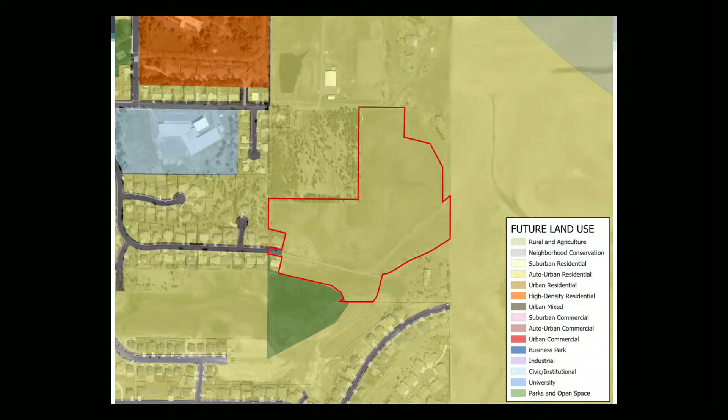So what the comp plan says about auto urban residential: it's intended to contain predominantly single-family detached homes on lots ranging from 7,000 to 11,000 square feet in size, more isolated from surrounding uses, which may require residents to rely more on automobile transportation. It could include areas generally anticipated to be developed for low to moderate density residential uses at densities between 3 to 6 units per acre, which could include a mixture of detached single-family, twin home, and townhouse residential dwellings. It points to the R1, R2, and R3 zoning districts as being the most appropriate for that designation.

That brings us to the current zoning configuration of the area. As I mentioned, it's ag forest, as are the properties to the north and east within the county. Properties to the west and south are R2 designation, which is the proposal before you tonight.

The R2 zone is a moderate density residential zone, appropriately applied where single-family dwellings predominate the area, terrain is not harshly irregular, and smaller lot sizes can be accommodated without extensive earthwork. Utilities and other public facilities are adequate for the densities allowed, and the existing lot development patterns and policies embodied in the comp plan also guide the application of the zoning district.

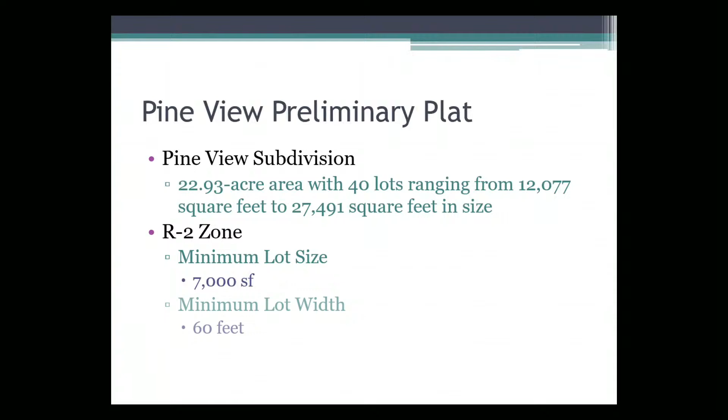So that brings us to the proposed subdivision before you tonight, Pine View. 40 lots ranging from a little over 12,000 to 27,491 square feet in size. R2 minimum lot size is 7,000 square feet, so exceeding that by quite a bit. The minimum lot width is 60 feet, which all these proposed lots exceed by quite a bit as well. This is the proposed subdivision plat.

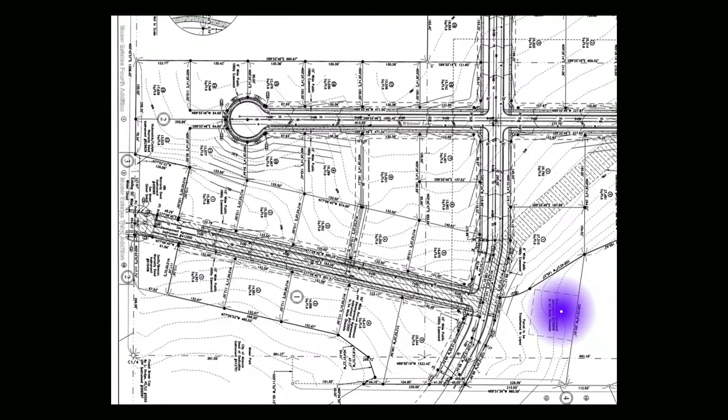So moving further to the east, you can see the subdivision's proposed to be extended and stubbed to the property to the east.

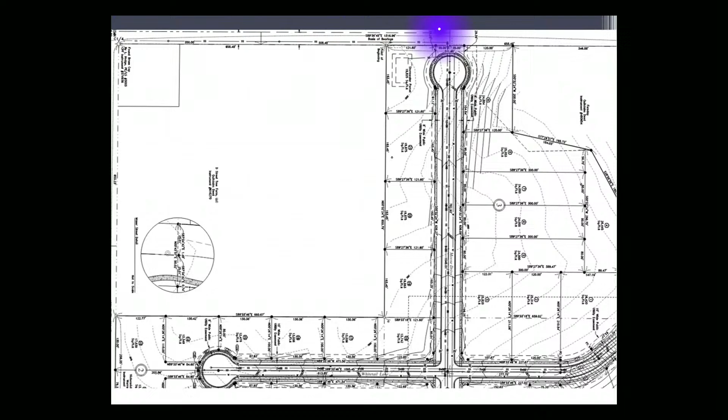And then looking to the north, there's a cul-de-sac proposed. This is required for fire truck turnaround purposes, but the right-of-way actually extends to this northern property line. So if D Street were to be extended in the future, it would tie into that intersection with Moose Drive.

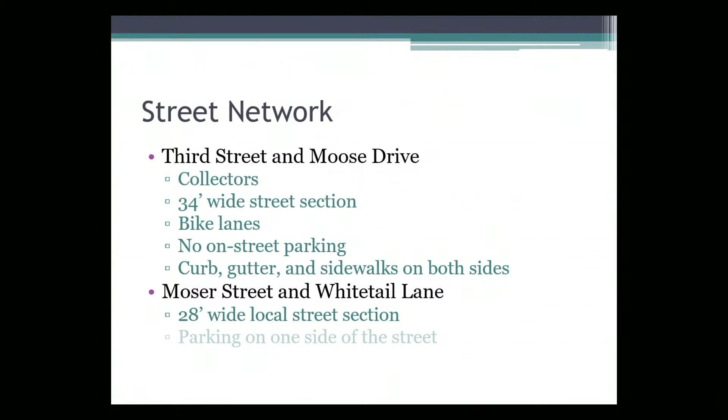So looking at 3rd Street and Moose Drive, they're collector streets, which means they're 34 feet wide with bike lanes, no on-street parking, curb gutter sidewalks on both sides of the street. Moser Street and Whitetail Lane are local neighborhood streets, so they're 28 feet wide, with parking on one side of the street, and of course curb gutter sidewalks on both sides as well.

Water service in the area - there is an existing main on Moser Street and a future main in 3rd Street when Rolling Hills 10th is extended. Sanitary sewer is proposed to be extended through the subdivision and conveyed along existing utility easements along the future alignments of D Street. The subject property is considered developable in the comprehensive sewer system plan.

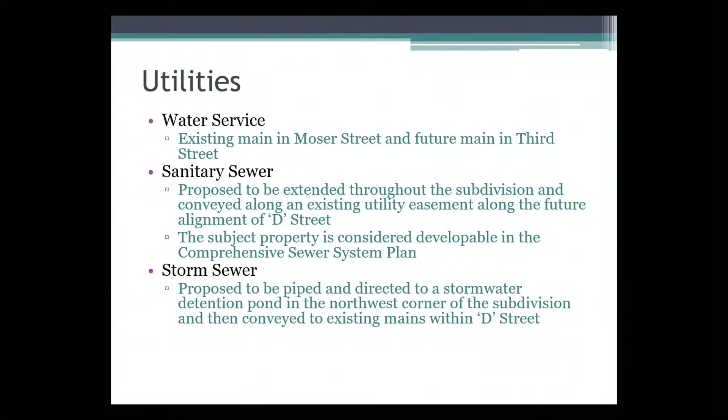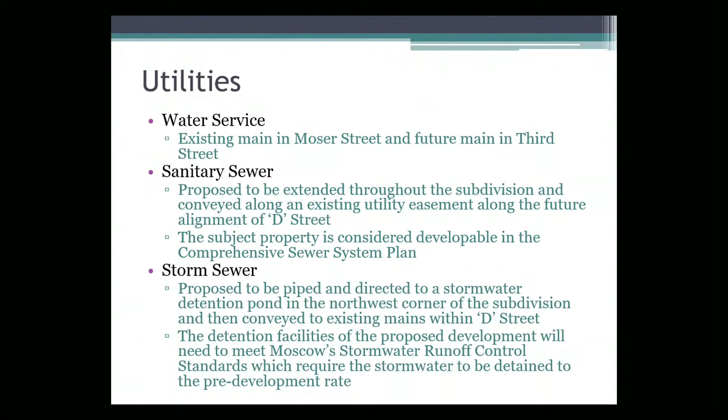Storm sewer is proposed to be piped and directed. There's a stormwater detention pond in the northwest corner of the subdivision next to the cul-de-sac, which will then be conveyed to existing mains within D Street. There is a utility easement that runs along that property that connects to the existing mains in D Street, even though there's not right of way for a street. And of course, the detention facilities of the proposed development will need to meet Moscow's stormwater runoff control standards, which requires the stormwater to be detained to the pre-development rate.

The parkland dedication requirements have previously been satisfied with a parkland dedication of 1.37 acres towards the creation of the city's Moser Park in 1994. So no further parkland dedications required.

Staff recommends the commission conduct the public hearing and, upon consideration of testimony received, recommend approval of retaining the existing comp plan designation, approval of the proposed rezone from ag forest to the R2 zone with no conditions, and approval of the proposed preliminary plat referred to as Pine View subdivision with the following conditions.

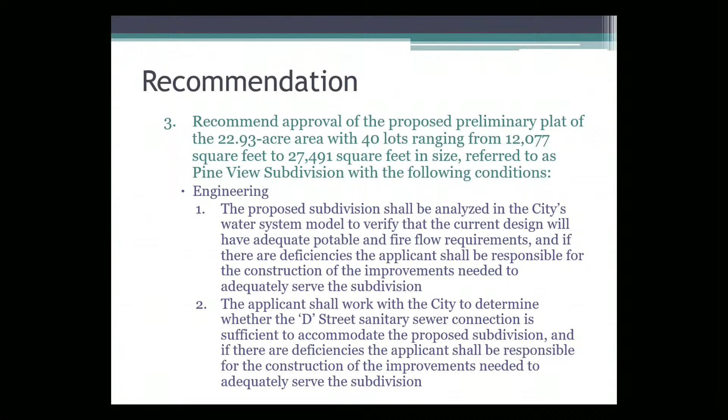If there are deficiencies, the applicant shall be responsible for constructing the improvements needed to adequately serve the subdivision. Third, in accordance with the prior development agreement, the applicant shall be responsible for constructing all public improvements from the current terminus of Moser Street to the subject property. There are a couple of lots there that were allowed to be developed with houses, and those currently don't have street improvements in front of them, so this would be the responsibility of this applicant.

Fourth, the applicant shall be required to conduct a detailed stormwater discharge analysis, including any mitigation actions necessary to ensure the stormwater facility has no downstream adverse impacts, subject to the approval of the city engineer.

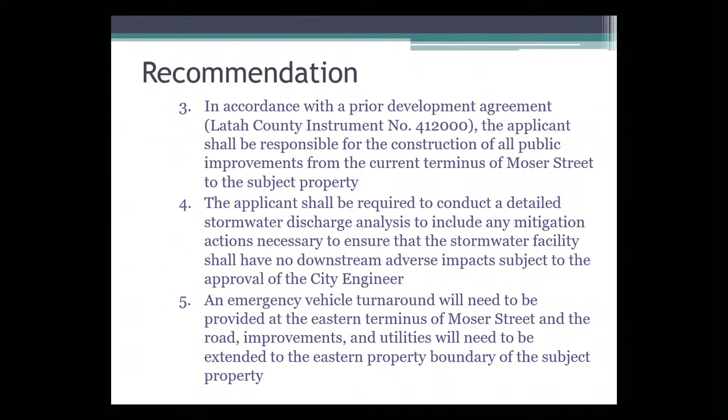Fifth, an emergency vehicle turnaround will need to be provided at the eastern terminus of Moser Street, and the road improvements and utilities will need to be extended to the eastern property boundary of the property.

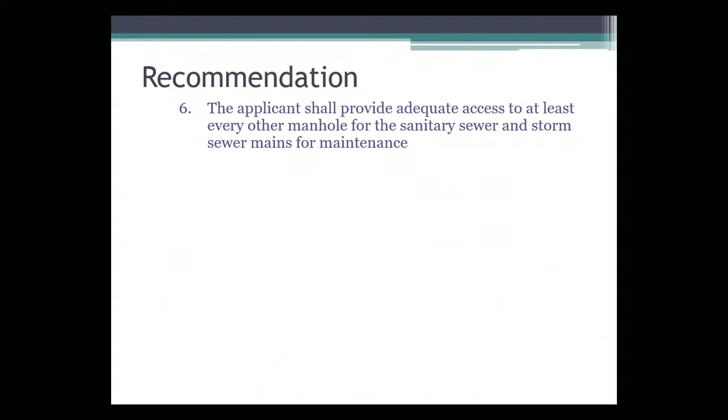Sixth, the applicant shall provide adequate access to at least every other manhole for the sanitary sewer and storm sewer mains for maintenance. The applicant shall also connect the water line in Whitetail Lane cul-de-sac to the water line in Moser Street for water quality and redundancy purposes.

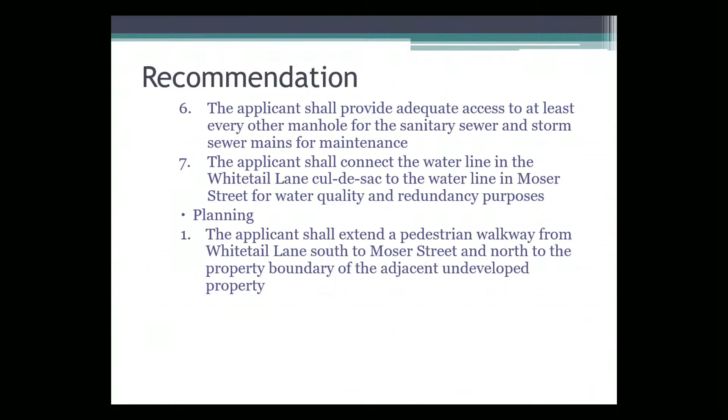Lastly, the condition recommended by planning: the applicant shall extend a pedestrian walkway from Whitetail Lane south to Moser Street and north to the property boundary of the adjacent undeveloped property.

In accordance with the commission's decision on the comp plan, rezone, and preliminary plat, staff will be directed to prepare RCS documents to be reviewed at a future meeting. I'd certainly be able to answer any questions you had.

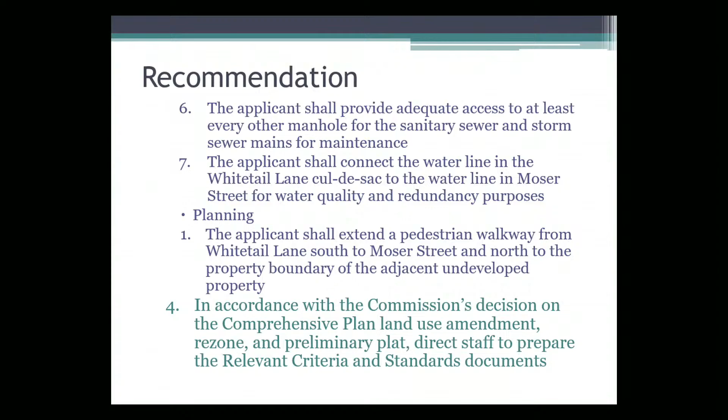Does anybody have any questions, Sue? I have a question. It says R2 Auto Urban Residential calls for lots ranging from 7,000 to 11,000 square feet. So is the 11,000 a max? Because these lots are all larger than 11,000.

The comp plan is a general guidance document, so it wouldn't be code that requires a max of 11,000 square feet. It's just general guidance as far as what the typical range of square footages would be.

So just to follow up on her question, if there was a 14,000 square foot lot, that's not a problem? We have minimum lot size requirements within the zoning code, but there are no maximum lot sizes defined. So aside from that, they would be allowed to. The figures are guidelines. Exactly. We presume that most people aren't going to give a big lot away for less money.

Has anyone else got any questions for Mike? Dennis? Yeah, Mike, what happens to the city limits—is it just going to draw around this parcel? It would. Yep. So you don't get an area of impact after that.

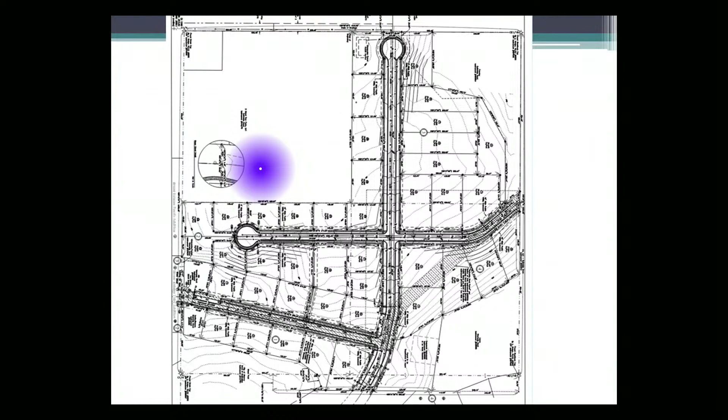So if this property is ever developed in the future, you're going to have only access off of the future extension of D Street. So you won't have any streets that connect to the rest of this subdivision. You've got a park right down here in the corner. So if you lived down here in this subdivision, say it was platted and there was a street that went through and you had a lot down here, you'd have to walk all the way out here and around down the street in order to access the park.

In order to provide pedestrian access, a more direct route to a facility like a park, we do try to provide that to our parks, especially considering that kids will use them. I'm with you. So you're just going to build a path that just terminates at the tree farm? Is that what's going to happen? Correct. Yeah, so he could put up a fence if he wanted.

Mike, you did say at the end of Moser that is gonna connect to the gravel road on D, or is that what you were saying? If it's ever developed - the issue is, I think we have 30 feet for an easement for utilities that extends over here. But this is still in the county, so they still own to what would be the middle of the right of way. And so if they were ever to develop the tree farm property, they'd have to dedicate probably 30 to 40 feet of additional right of way for the road to extend.

So that's our issue. If that ever got developed, this was dedicated, the road was extended - they extended the right of way at the end of Moser to be able to tie into D Street. So the right of way is there, we just need the extension on D Street in order to connect. Is there not a gravel road on the end of D Street? Does it go all the way to Moser?

It's a gravel road, but it's not a public right of way, it's just for access. I'm just wondering, because kids are gonna go that way whether we want them to or not. They'll be able to come through - it's on Mr. Rangan's property, and then there's another driveway that extends across that. So technically they could say no trespassing on that. But it's gonna connect, right? Oh, I see what you're saying. But there is access all the way to the property line at the end of that cul-de-sac, right? Yeah, yeah.

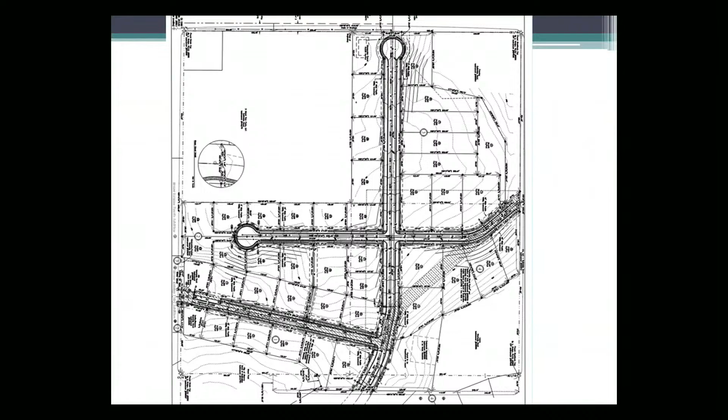If this property were to be annexed, then the tree farm would be an island. So what we're doing is kicking the can down the road - the issue will come up, but tomorrow. If this property's ever developed, that'll be the question. I got it, yeah - the city juts out, it's not an island. Thanks.

Well, the pedestrian paths would be located in this vicinity here. There's already one located down here that provides access. This is the park property, the triangular shaped piece. So the paths would connect at one point in this location, and that would go straight down to Moser Street to be able to connect to the park.

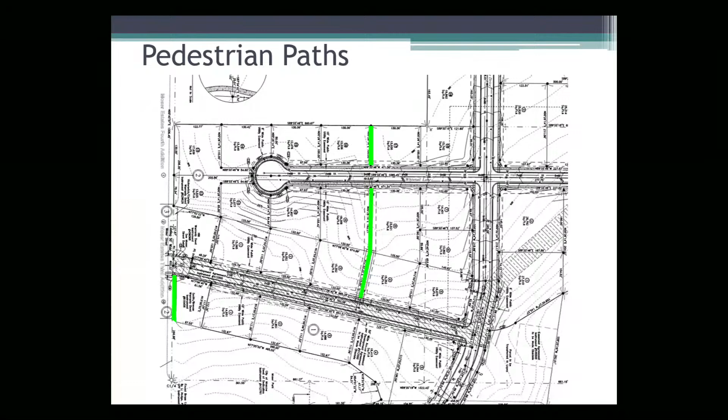That easement's like 30 feet wide, 40 feet, 30 feet. It's typically only 10 feet wide. Unless there's utilities, then it'd be wider, but it's typically 10.

When you were mentioning daycares and other permitted uses, was that permitted in the zoning code or in the comprehensive land designation? In the zoning code. Well, just for future thought, if you remember way back when the first iteration of trying to extend housing up Third Street, there was a proposal to put neighborhood commercial right at the intersection of Third and Mountain View. The idea being that as subdivisions and people are moving further out of the city, they'd still have access to small things - a hairdressing salon, coffee shop, whatever - something small that would serve that community.

So you're saying there's no neighborhood commercial allowed in the zoning code you're talking about, R2? Yeah, I'm not saying these people have to do it. I'm just saying this is what the Planning and Zoning Commission have been thinking about for a long time.

That's a specific zone, neighborhood business. So that property actually was zoned neighborhood business. There's still a parcel at that northeast corner of Mountain View and Third Street that is zoned neighborhood business, so it's intended to be a commercial use at that location. But the allowed uses within the R2 zone are the ones I listed, so no other uses would be permitted. I'm not saying for this, but I think in the future we need to be thinking about not just having an exclusive, because that would be like a little island, but anyway.

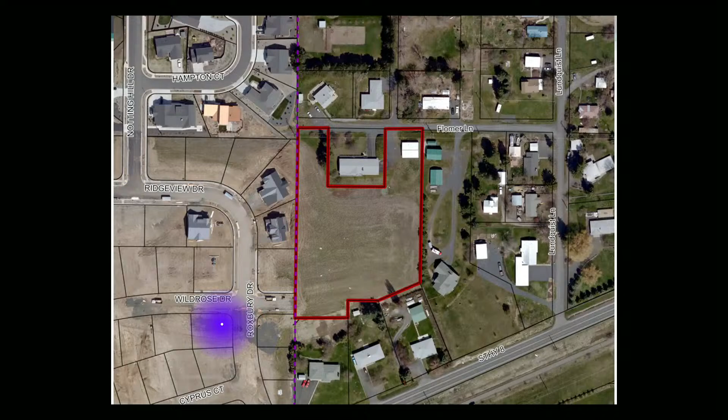So just a closer view of that property. Currently, street access through Ridgeview Second is Wildrose Drive, teed here.

So the applicant is Providenza LLC, and they're proposing 4 actions for this 2.53 acre property. The first is to retain the current comp plan designation of auto urban residential. The second is to rezone from the R1 designation, which is low density single family residential, to the moderate density single family residential R2 zone.

We already covered in the prior hearing that the commission intends to provide a recommendation on the comp plan and the rezone upon annexation. So the Wild Rose Court PUD and preliminary plat contains 16 lots ranging from 3,000 to 10,666 square feet in size, served by a private street. There's a pathway connection that's part of the parkland dedication, and an open space parcel as part of the bonus density requirements of the subdivision.

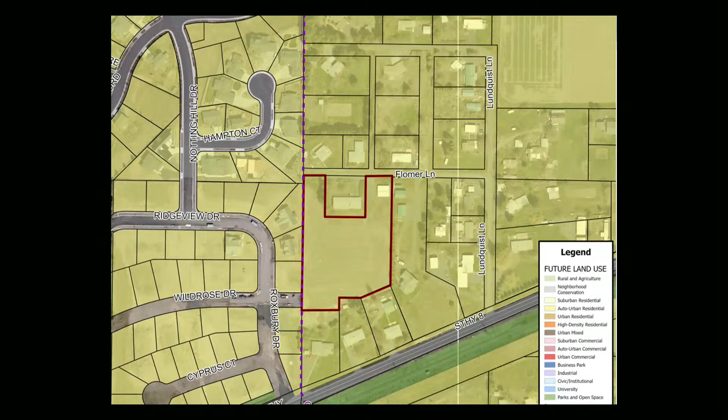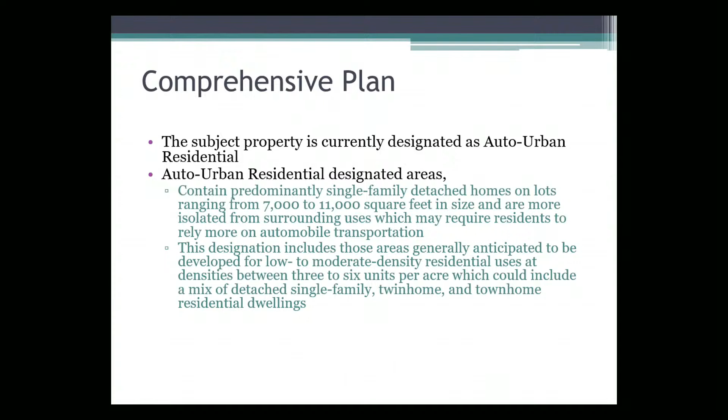So it brings us to the comprehensive plan land use designation, auto urban residential. This was the same designation as the last hearing, so I'll just quickly move through this. It points to R1, R2, R3 as being the most appropriate designation.

This brings us to the zoning configuration of the area. Ridgeview Second is really a combination of R3, R2, and R1. As you head to the north, it transitions to R1. We have the Southgate subdivision on Notting Hill heading to the north, and the White Avenue roundabout further out of your screen there. A lot of the other properties in the county are located in the R1 zone as well.

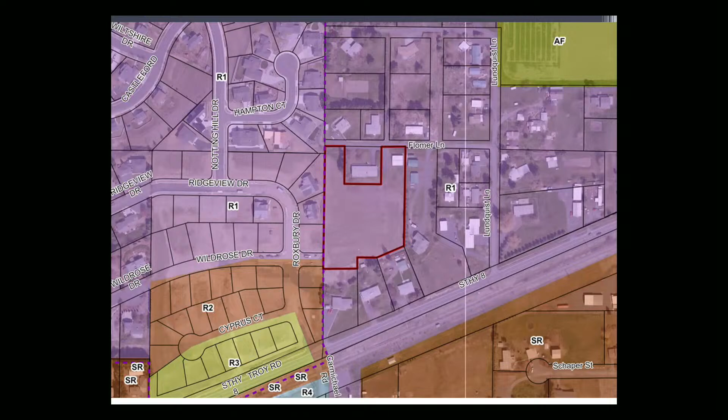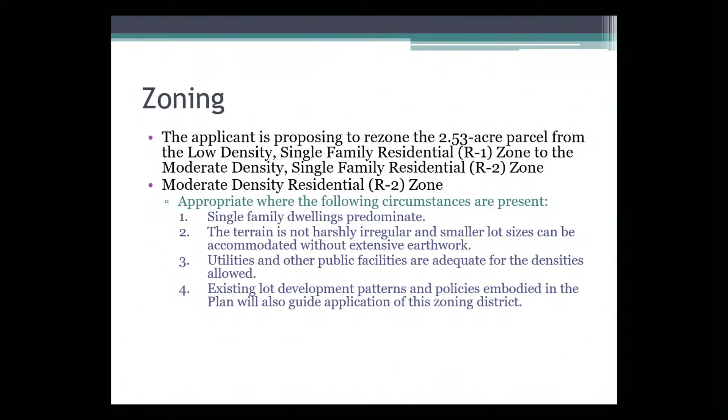The proposal would be to rezone this property to the R2 designation. What the R2 zone states is that it's appropriate where single-family dwellings predominate the area, terrain's not harshly irregular, and smaller lot sizes can be accommodated without extensive earthwork. Utilities and other public facilities are adequate for the densities allowed. Existing lot development patterns and policies embodied in the comp plan also guide the application. Like we covered before, it's really a single-family zone, but also includes a few other uses.

So it brings us to the Wild Rose Court subdivision: 16 lots, 3,000 to 10,666 square feet. Minimum lot size for R2 is 7,000 and minimum lot width is 60 feet, which is why they're required to go through the planned unit development, or why they're applying for that.

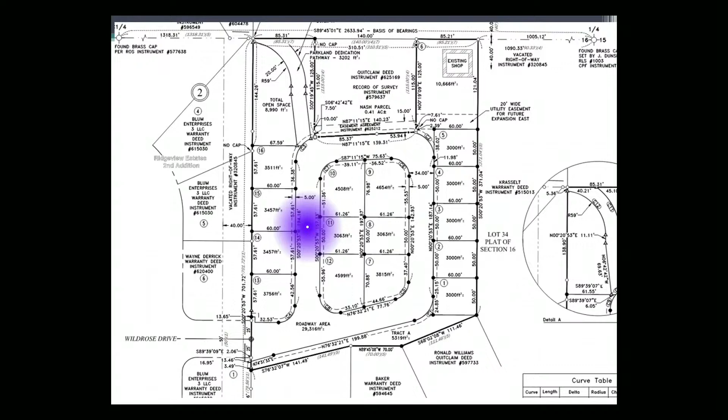So it brings us to the proposed preliminary plat. You have the extension of Wildrose Drive, which will end up with a circle designation, so it turns into a private street. You can see that located here, circling through the development. There are essentially 15 lots, and this would be the 16th lot with frontage on Flomer.

This would be the proposed pathway connecting to the existing pathway in Southgate Second, and then this would be the open space area which the pathway transects there. Tract A is a stormwater detention parcel located here to the south.

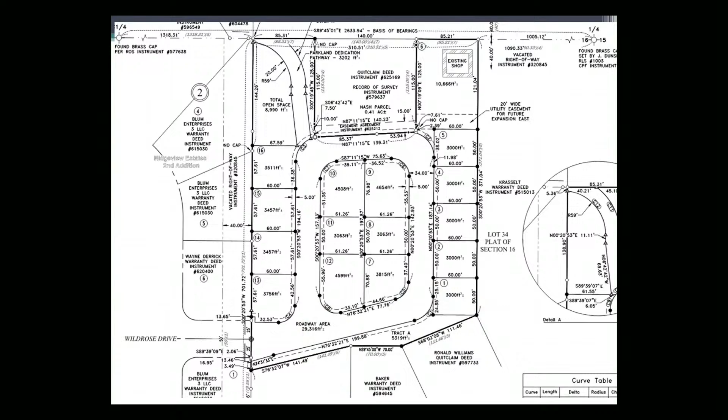The applicants proposed a PUD to coincide with the plat, and they're requesting numerous zoning code deviations to accommodate smaller lot sizes and a more compact development. So 15 of those lots would have a similar style single-family home constructed on those properties. The square footage, or floor area, is 1,500 to 1,600 square feet being proposed currently. It's a 3-story design with the lower level partially daylighted on one side to follow the contours of the property, with multiple floor plan options available per each of the 3 floors.

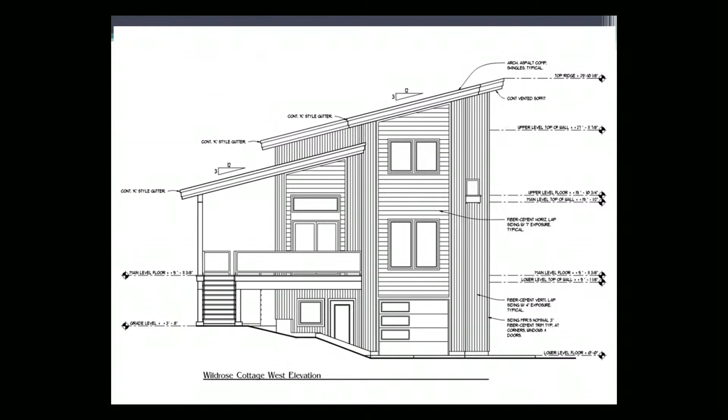This would be the proposed building elevation design the applicant has submitted. This is a view from the front, partially daylighted on one side, into the hillside on the other, with more of a shed roof design, modern. This would be a view from the side, and a view from the other side.

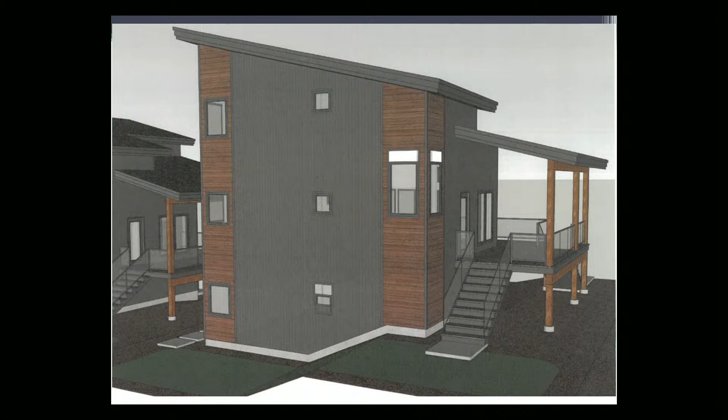So just a rendering of the front of what these would look like. Another angle. And then at the rear of the property.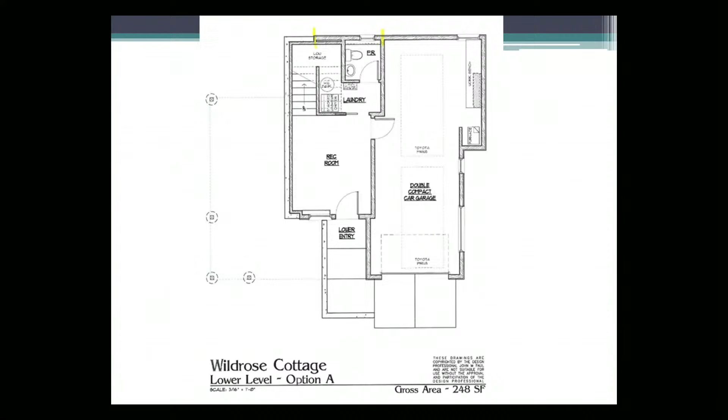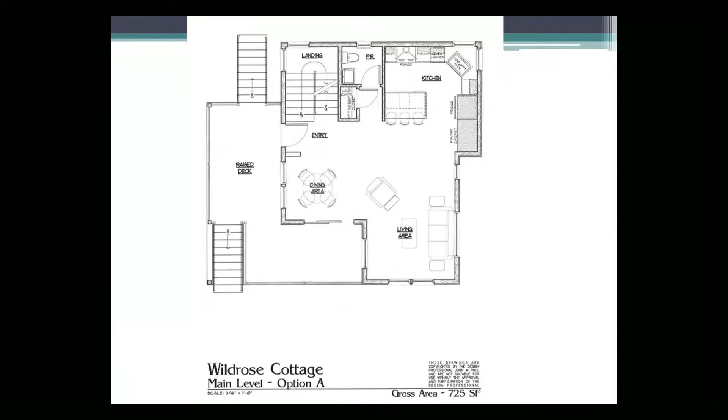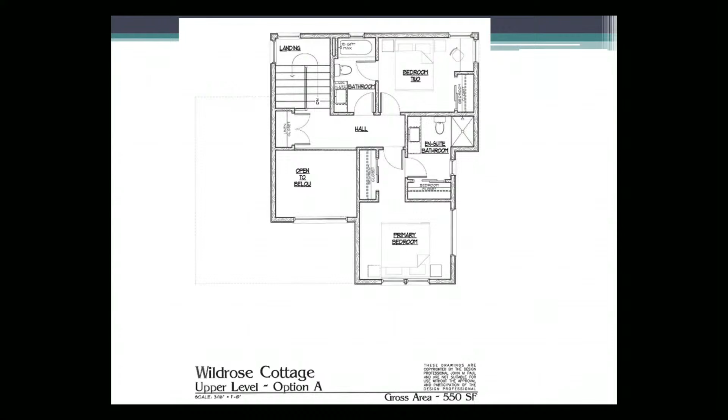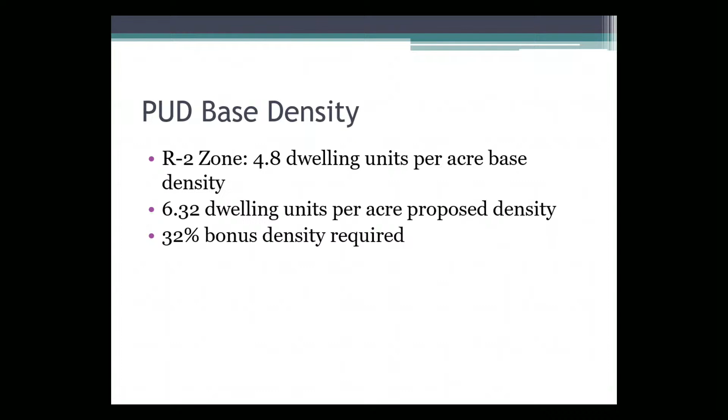The R2 zone brings us to the base density. There's 4.8 dwelling units per acre base density defined in the PUD code, with 6.32 dwelling units per acre proposed as part of this project, thus requiring a 32% bonus density.

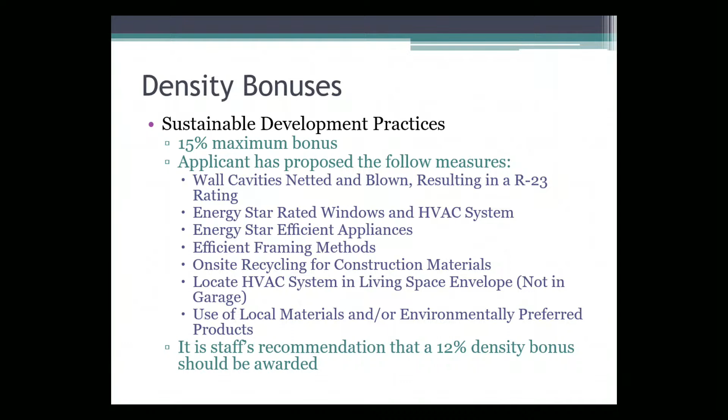Sustainable development practices allow a 15% maximum bonus for this category. Applicants propose the following measures: additional R value insulation in the wall cavities, Energy Star rated windows and HVAC systems, efficient appliances, efficient framing methods, on-site recycling for construction materials, the HVAC system located in the living space envelope rather than the garage, and the use of local materials or environmentally preferred products. With those proposals, our recommendation is that a 12% density bonus should be awarded for sustainable development practices.

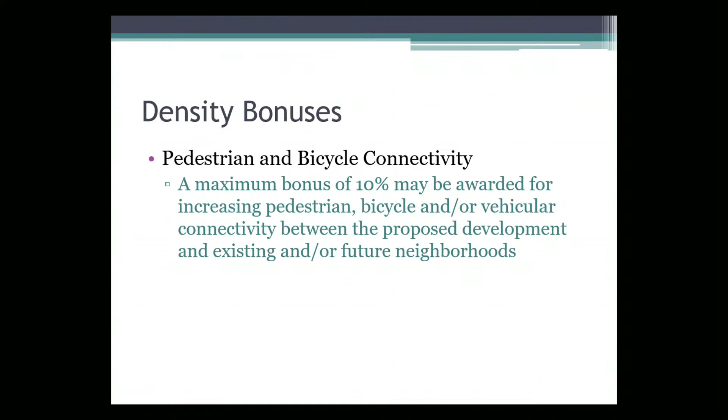Pedestrian and bicycle connectivity allows 10% to be awarded for increased pedestrian, bicycle, or vehicular connectivity between the proposed development and existing or future neighborhoods. The applicants slightly exceeded the parkland dedication, choosing to develop the pathway instead of traditional parkland, so we recommend a 5% density bonus should be awarded there.

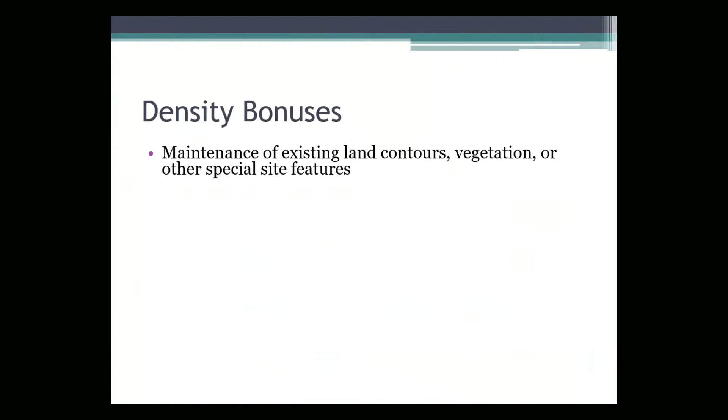Maintenance of existing land contours, vegetation, or other special site features allows a maximum of 10% to be awarded based upon the amount of site disturbance, including whether there's minimal or slight disturbance, whether there's excavation other than for structural foundations, whether streets follow contours of the land, amount of grading, and whether there was removal of natural vegetation.

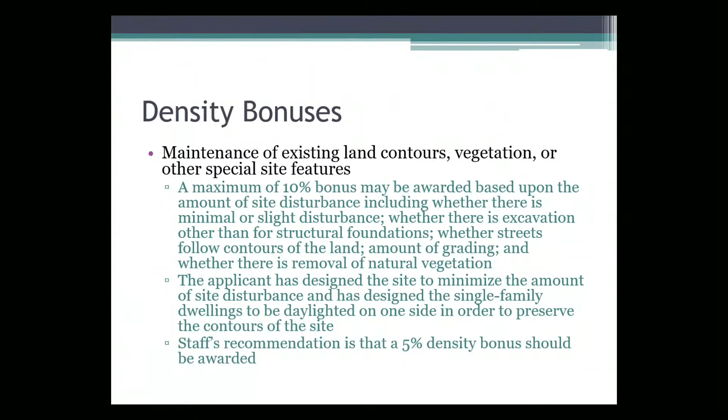The applicants designed the site to minimize the amount of site disturbance and also designed the single-family dwellings to be daylighted on one side in order to preserve the contours of the site. We'd recommend that 5% be awarded for this category. So with that, all those density bonuses would add up to the 32% needed as part of the project.

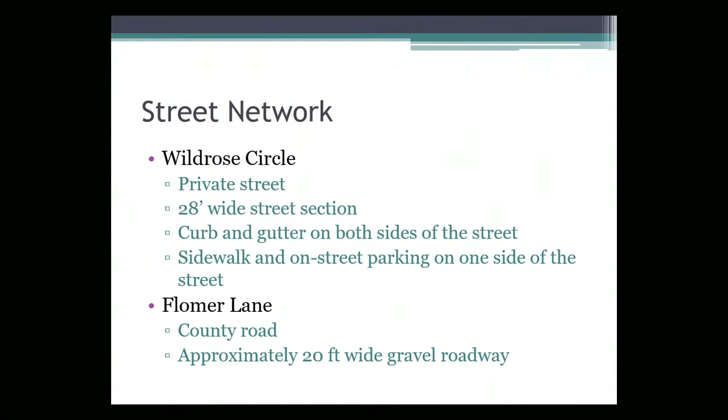Looking at the street network, Wildrose Circle is a private street. Typically it's 20 feet wide, but they've widened it to 28 feet to allow on-street parking on one side of the street. Curb and gutter is on both sides of the street as well. Sidewalks are just on one side, and on-street parking's on that one side as well. Flomer Lane is a county road, approximately 20 feet in width, and it's gravel.

That brings us to utilities. The water service is extended via Wildrose Drive. I'd note that there's a larger property located to the east, and they have extended a water line at our request. That property could reasonably be divided into maybe 2 or 3 lots, and that would provide access—maybe they annex in the future—and then gravity to the sewer system in Troy Highway. So we wanted to provide that connection or opportunity to that property, and the water line's been extended there. Our 2012 comprehensive water system plan considers the property developable.

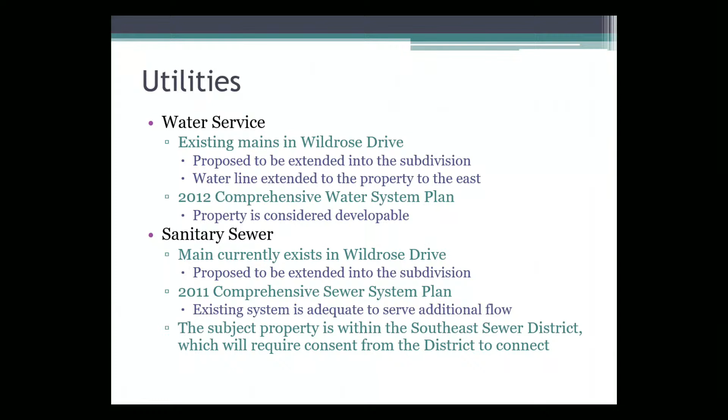Sanitary sewer mains currently exist in Wildrose Drive, proposed to be extended into the subdivision. Our comprehensive sewer system plan states that the existing system's adequate to serve additional flow. The subject property is within the Southeast Sewer District, which requires consent from the district to connect, and our comp plan indicates that 50 to 75% pipe capacity still remains in the district, depending upon location.

Storm sewer will be piped and directed to the stormwater detention pond located near the entrance of the subdivision, and that'll need to meet Moscow stormwater runoff control standards to be detained at the pre-development rate.

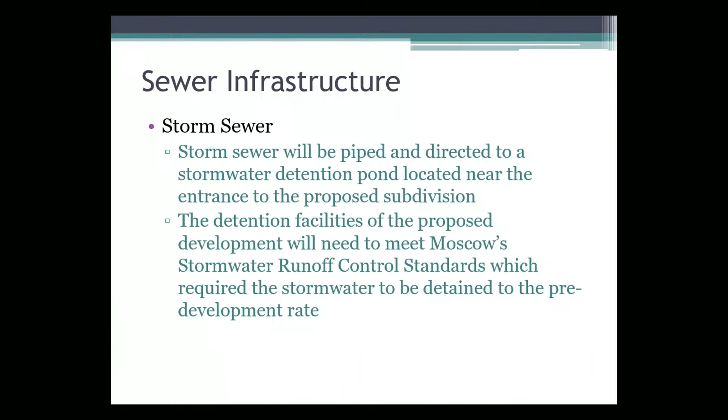Parkland dedication is 1.46 acres of net developable land. The R2 zone requires 5% dedication, which equates to a 3,177 square foot requirement. Applicants proposed a 20-foot wide corridor and the construction of an 8-foot wide pathway for a total parkland dedication of a little over 3,200 square feet.

The Pathways Commission reviewed the proposal on February 13th of this year and recommended approval, as did the Parks and Rec Commission on February 22nd, which also recommended approval.

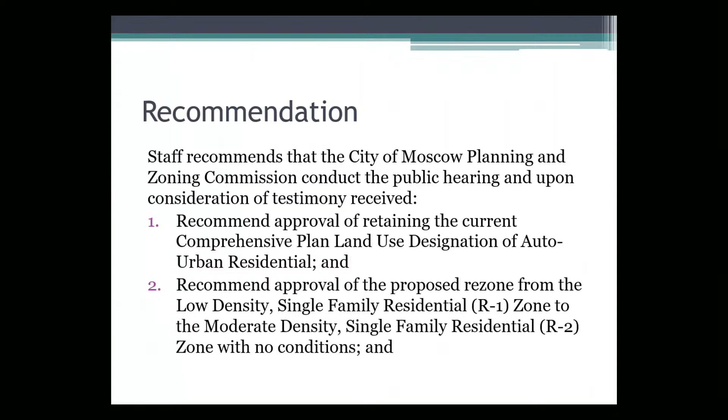That brings us to the staff recommendation that the commission conduct a public hearing and, upon consideration of testimony received, approve retaining the current comp plan designation of auto urban residential, approve the proposed rezone from R1 to R2 zone with no conditions, and recommend approval of the proposed PUD with the following condition: in order to achieve the full 5% density bonus for landscaping, the applicant shall expand the landscape plan to include landscaping on individual lots and the entrance to the subdivision.

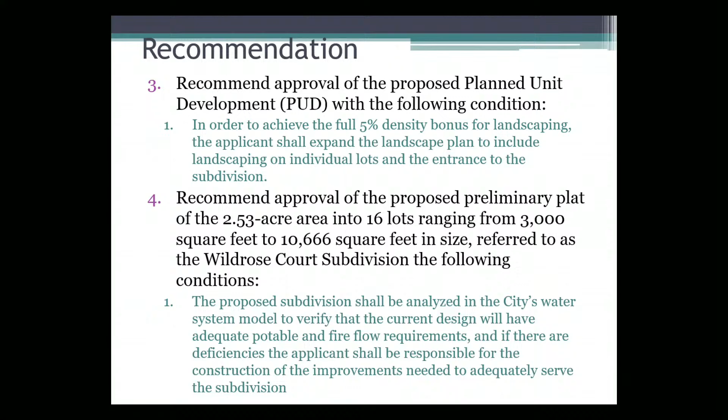Recommend approval of the proposed plat for Wildrose Court subdivision with the following conditions: the proposed subdivision shall be analyzed in the city's water system model to verify that the current design will have adequate potable and fire flow requirements. If there are deficiencies, the applicant shall be responsible for constructing the improvements needed to adequately serve the subdivision. The applicant shall gain approval from the Southeast Sewer District to accept sanitary sewer water in a form acceptable to both the city and the district.

The applicant shall dedicate 10 feet of right-of-way along the Flomer Lane frontage of the subject property in order to accommodate the construction of a local street per city standards in the future, in the event it becomes necessary to do so. The applicant shall also be required to conduct a detailed stormwater discharge analysis, including any mitigation actions necessary to ensure that the stormwater facility has no downstream adverse impacts, subject to the approval of the city engineer.

The applicant shall extend the water main currently terminating at Lot 13 to the south to connect with the water main within Wildrose Court, to improve water quality and redundancy in the subdivision. Then, in accordance with the commission's decision on the comp plan, rezone, PUD, and preliminary plat, direct staff to prepare the RCS documents. I'd certainly try to answer any questions you had.

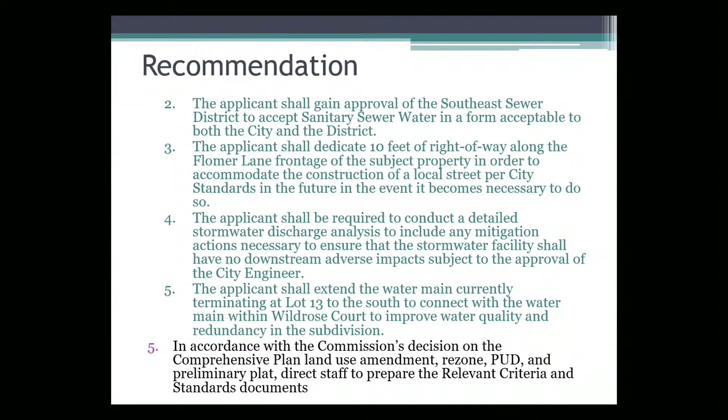So the landscaping plan needs to show what they're going to do with each lot and the entrance. Instead of having a water-guzzling lawn, they may put in xeriscape. There'll already be smaller yards, so that helps with water. That's typically what happens with PUDs - they'll have a landscape plan, then each lot will have a certain number of shrubs, trees, and ground cover they choose to include. So it would just be as simple as showing what they're going to plant on each property, and the big benefit is we save water.

Anybody else got any questions for Mike? So is this on the sewer district or city? Southeast Sewer District. It'll be on the Southeast Sewer District.

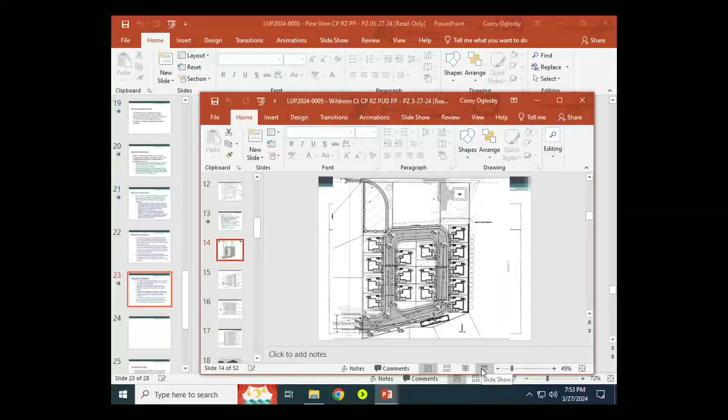Anyone else? Any questions for Mike? Well, can we go back to the map of the boundaries of the subdivision? So Flomer Lane is where, on the very top? Yeah, you can see it there. So there's currently a shop building here. There's a gravel driveway that comes off, providing rear access. There's a house here that's not part of the project.

So I guess that's my question - if there has to be a dedication of 10 feet of Flomer Lane, how do you get that from the house that's already there and the other shop? It wouldn't be from this property, it would just be on this property here. So there is 10 feet to dedicate in front of the shop there. They're planning on removing that shop, I believe. So that line is part of this development, that's the part that has to have the extra 10 feet. Yeah, it would just be this portion and this portion right here. I was wondering about the middle. Yeah, that's an adjacent property owner, a different property owner - I was wondering if you were going to demand something of a person who wasn't even in this development. Okay, all right, thank you.

Okay, anyone else for Mike? Any questions? All right, thanks, Mike. We'll open the public hearing and hear from the applicant.

Once again, it's Scott Becker with Hodgson Associates, 405 South Washington. I believe Mike covered all the areas of interest or concern, but if there's any engineering questions, I can answer that. The owner developers are here too, and they would gladly answer any other questions you might have. Anyone have any questions for Scott? Thank you very much, thanks Scott.

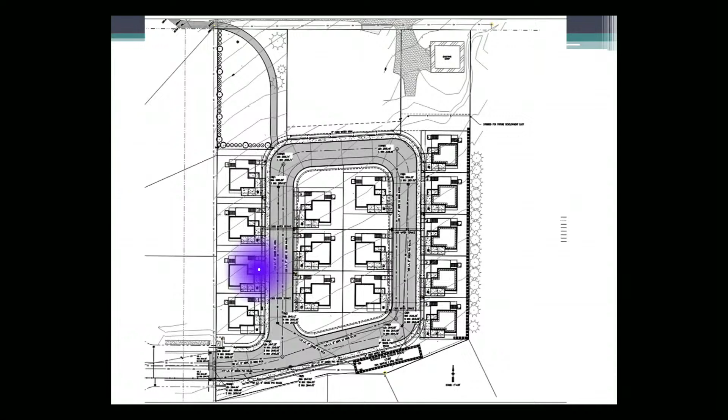I mean, presumably, if you looked at their original design, there was a cul-de-sac that went up here. Even if you had lots that were the same size as this, you could presumably put a monolithic structure house right there that would have the same effect on the view shed. It's up to 35 feet in height for the building limitation. So probably the two smaller structures is going to be better than one large, 4,000, 5,000 square foot house on a huge lot right there.

So, I mean, no, it's just like this current design. I like the small density of it, but I was going through the view and the sunlight and seeing if there's anything in the setback we could do. If not, it is what it is.

So we're being asked to approve the preliminary plat, not the design of the houses, right? It's part of a PUD, so it's all included. I thought it was the lot size too. Is it all of it? Okay.

So you guys got anything else you want to discuss or questions? I will say, it sounds like you have a developer who is willing to work with you as much as he can. He has to be able to pencil it out, everybody has to be able to do that. But you don't always get developers who are willing to do that, so.

So we probably have to take these each individual as well, right, Mike? Correct. So I just need to entertain some motions here to get this thing rolling. If you guys don't have any more questions or comments, I know we all feel bad.

I move that we accept the comprehensive plan use designation. One second. Okay, Victoria? Aye. Nils? Aye. Richie? Aye.